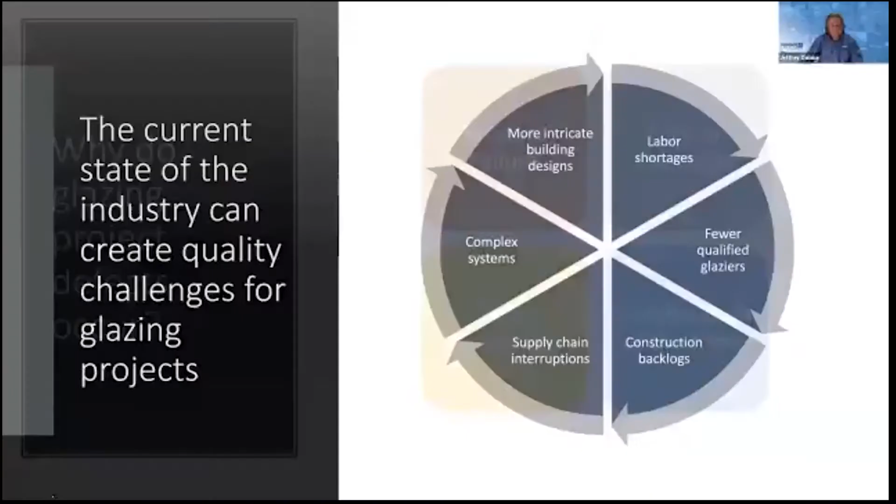While there are many reasons for a glazing project to have issues, there are some that are in direct control of the installer and the glazing contractor team. Product defects or failures from manufacturing are somewhat less likely, but can sometimes be headed off through thorough inspections and verifications of the material before it's installed. Where we're going to focus today, though, is on the discussion of oversight and verification, along with poor installation habits.

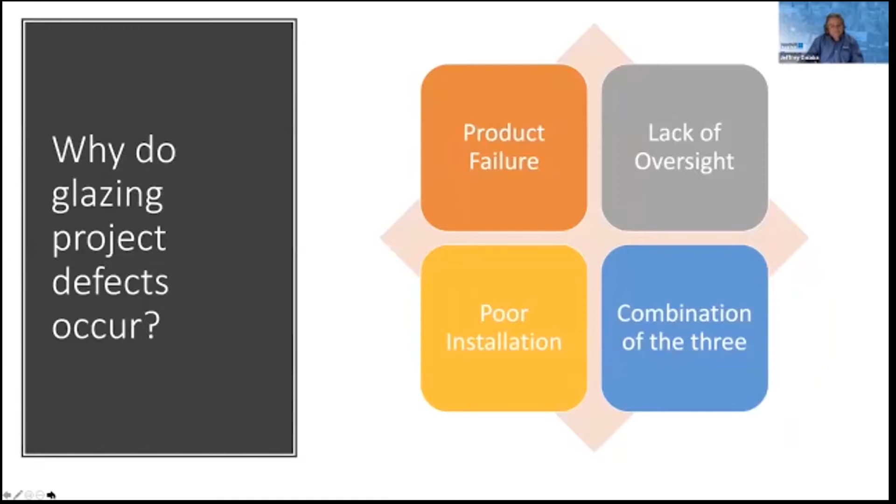Everyone seems to love pictures of projects where somebody else screwed up. We'll share a few of those today and talk about how they may have been avoided. But first, let's take a look at what we mean by quality management systems and how different interpretations of ways to install controls continue to provide better outcomes.

You're going to hear us talk about quality systems not just as an end check to see if errors are visible. You likely use many systems already in your shops and field operations for quality, with some that are written and some that are ingrained with years of experience and hard knocks. A quality management system, by definition, is a collection of business processes that are used to meet customer expectations and enhance their satisfaction, of course.

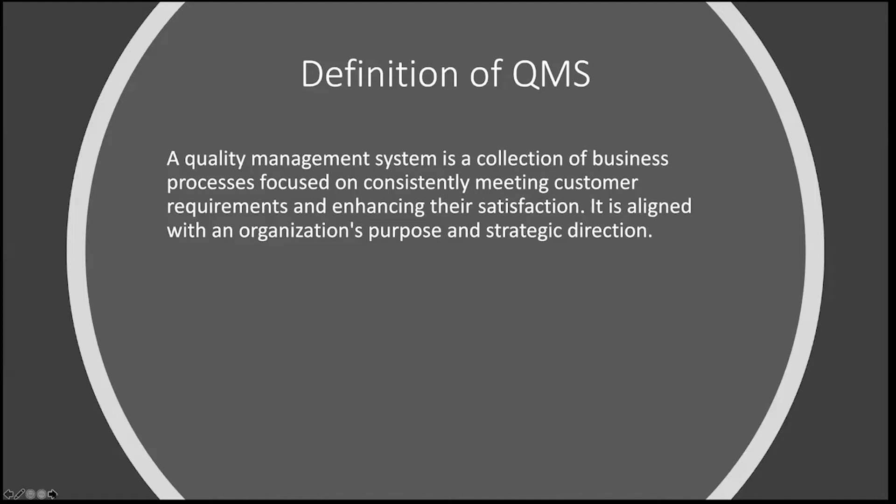It also ties directly to laying out the strategic direction of your company. In short, it's a one-stop system that controls the production and output of your company in a way that you decide will help bring the most value to your customers. So now let's take a look at what we mean by the word quality. We're simply referring to meeting customer expectations, customer specifications, contract requirements, and delivering a system that performs with fewer problems. This results in building a culture of professionalism within your organization and, of course, pride that carries through from beginning to end of every project you work on.

Let's also take a look at quality management systems and how they're built. As we mentioned a minute ago, a quality management system is a collection of business processes. The immediate item that jumps out to many when we say quality management systems is a quality manual. But the quality manual is simply the high-level layout of the entire quality program. The program itself includes procedures, methods, and checks to provide verification that the processes are carried out correctly.

Also, methods to capture deficiencies and prevent them from happening through corrective and preventative actions, along with managing customer feedback as it comes back. A good system will also include management input. This is achieved through annual internal reviews by management and audits, along with updating controlled documents and procedures. The whole thing works together to provide a controlled approach to quality on every project.

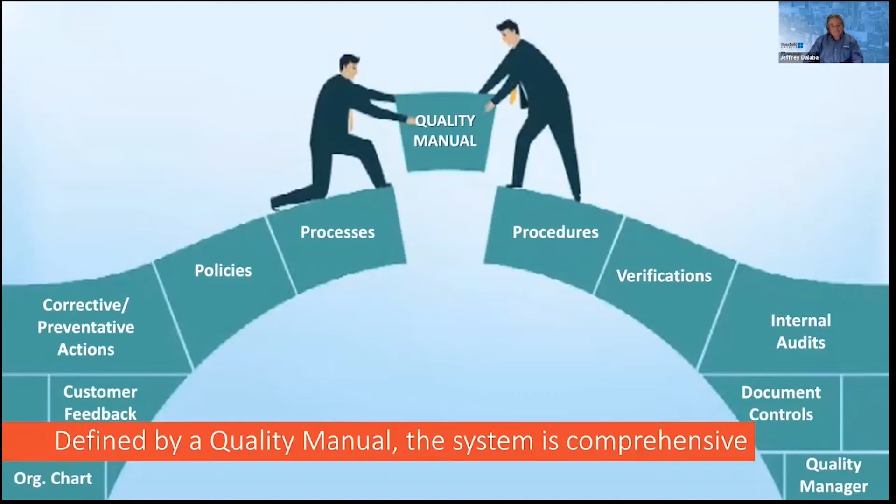I have to say that one of our NACC contractors said this best. He said, in the past, we focused on quality controls at the end of the process to make sure that client specifications are met. We spent significant resources fixing problems that could have been avoided. Now we put more emphasis on quality assurance throughout the process to prevent problems from occurring in the first place. And that was from Pacific Glazing Contractors in California.

I think what this really captures is that you're going to find some defects by looking at an end product, but there can be things that happen along the way that could be avoided. And that's really one of the things that we're focusing on today through this quality management systems discussion: each step of the way, there are opportunities to improve the overall outcome of the project.

I also think it's important that we differentiate QMS, or quality management systems, from quality control. What is the difference? We hear both. What does it mean when we say QMS versus quality control? They do go hand in hand, and they differ in their approach and also in their outcome. Quality management systems is simply a managerial tool. It's a very proactive approach to preventing defects. It involves your entire team, and it involves planning and a systematic documenting of processes. But when combined into one system, it prevents defects with a focus on process and controls.

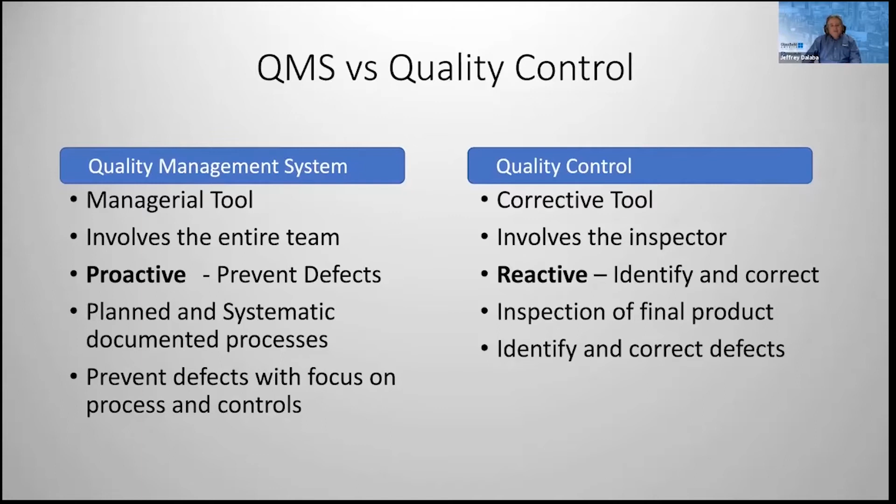Now, on the other hand, if we look at quality control, well, it may mean some different things to different organizations. In general terms, it's a corrective tool. It's a way of being reactive. There's an inspector or maybe a supervisor that looks at the end product and then identifies any defects or errors and marks them for correction. So they do go hand in hand, but I think it's important to note that quality management systems is a more proactive approach that involves a system in order to prevent the defects in the first place.

The important thing about quality management systems is that it helps the management team remove doubt and provide accountability when they're not at the job site watching the installation of every fastener or everything going into the system. Proper procedures and controls help to do that for them. And of course, QMS is all about improvement. So when an error or defect occurs, it has a defined path on how to improve and not repeat them in the future.

Now that you've had a look at what we mean by quality management systems and the word quality, let's take a look at what the final anatomy of a system like this might look like. And I don't want to concern anybody by making this look too complicated, but remember there are many pieces already in place in most organizations. Quality management systems is a way of helping to capture all of those into one place.

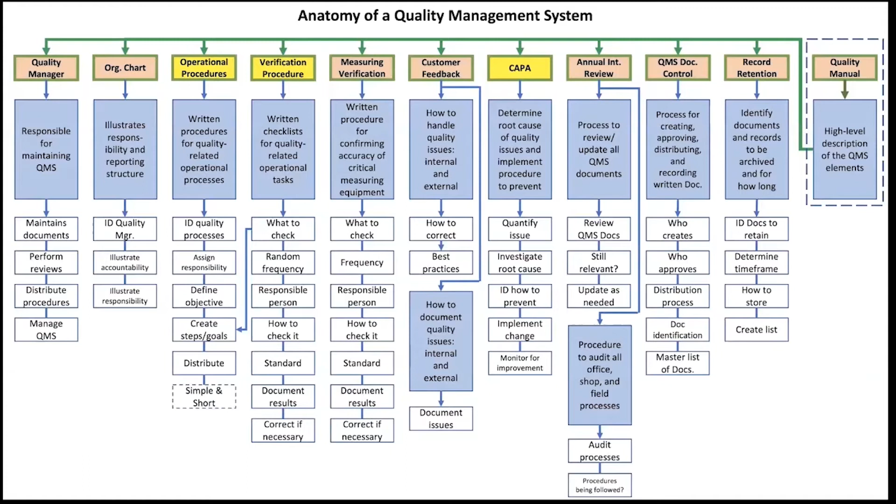We typically deliver these to our clients in three different workshops from a group of workshops that we offer. That's operating procedures, verification, and CAPA. We're going to look today at some high-level samples from each of these areas. And then as promised, we're also going to look at some pictures where somebody else made some errors, and it's always fun to see what somebody else is doing.

Let's start, though, at the core of this, which is creating operational procedures. We very much believe that operational procedures should be simple, and they should also do what makes sense for your business. This isn't a time to create something that's cumbersome and hard to follow, or many pages, or in fact reams of paper in some situations. This is simple, clear, and concise.

Why is it that we have procedures in the first place? Well, it's a way to create a track to run on. But we're going to talk about that, along with how to create procedures, and give you some examples of what a procedure looks like, both in an assembly situation along with verification. And then we're also going to talk a little bit about document controls, because when you have procedures, it's important also to control those procedures.

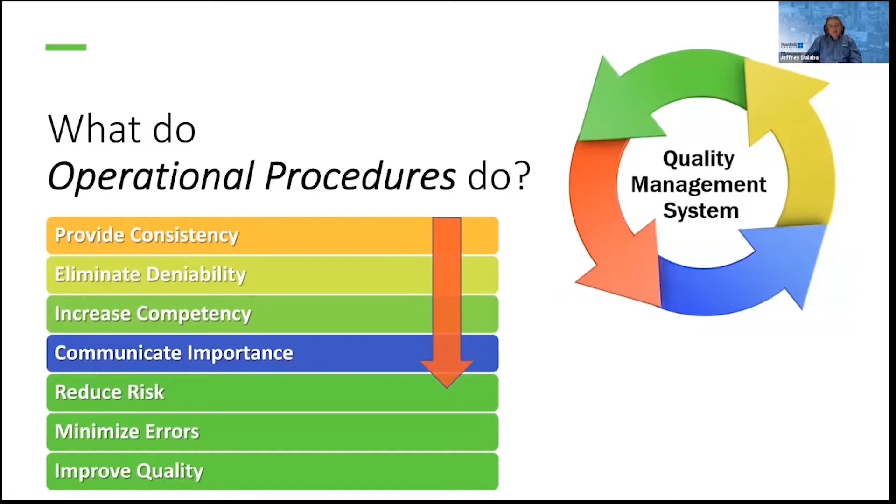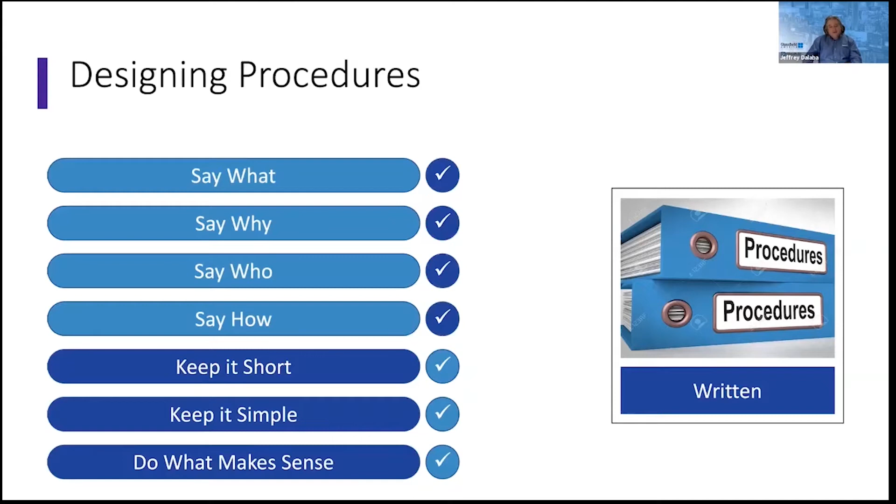It may seem daunting at first to say, how do I write a procedure, and how am I going to make it short and concise? Well, it all starts with having a track to run on for the procedure. We have to say what the procedure is for, why there's a procedure in place for that operation, who is assigned responsibility, and how—that's the steps, that's how it's done. Again, clear and concise: one sheet of paper is better than multiple sheets when possible. Keep it short, keep it simple, and as we said, do what makes sense for your business. This is an example of a procedure.

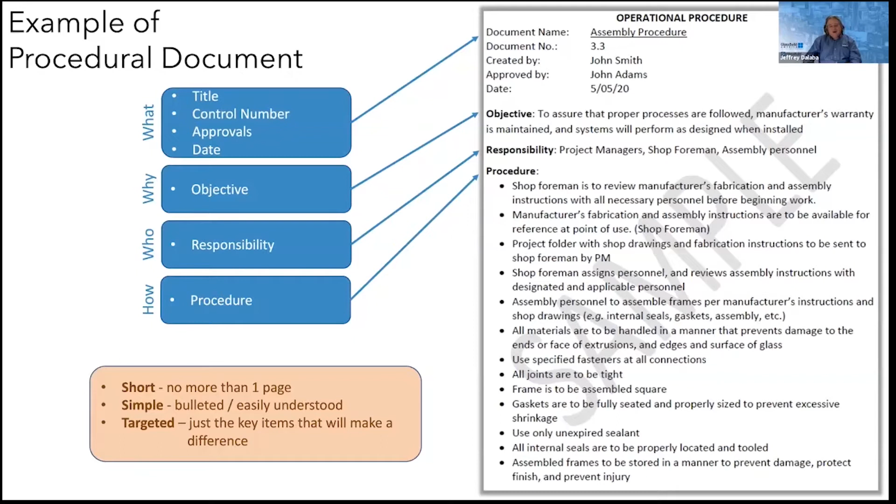And this, of course, is just a simple example. Each organization would have different takes on what should be in an assembly procedure. But I think you'll see from this one-page example, it's short and simple. In this case, we use bulleted points to cover this so it's easy to follow. It's also targeted—just the key items that make a difference are highlighted.

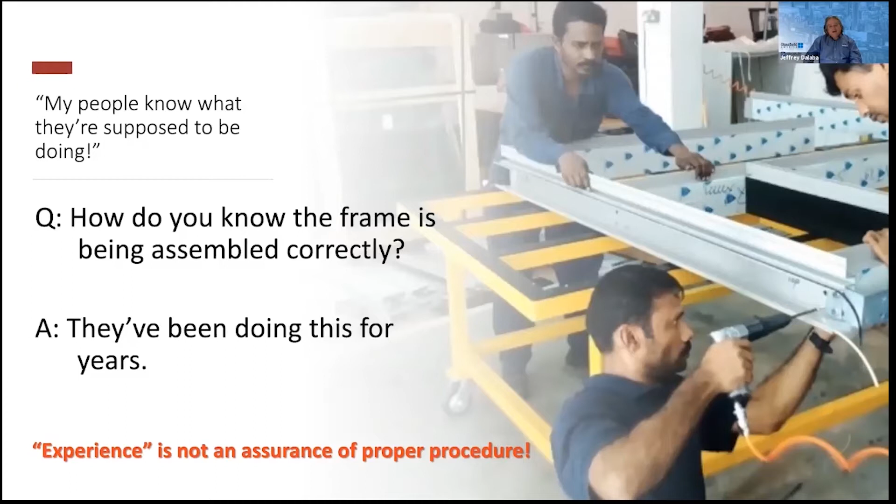As a segue from that, since errors do come up, corrective actions and preventative actions are a way to improve your quality and performance. Corrective and preventative actions do exactly what they say—correcting items that come up as deficiencies, defects, or failures, but also preventing things from happening in the future that could impair quality. I'm going to turn it over to Ben Beeler now to talk about this section, and thank you.

I'm going to talk a little bit about corrective action and preventative action, what we call CAPA in the industry. This is really the cornerstone, the foundation of a quality improvement process. Without this, you really can't improve quality.

So I'm going to ask the tough question now. Is quality important to your business? Well, of course it is. Everybody says it is, everybody believes it is. But how do you measure quality? If you're not measuring quality, then how can you control it? How can you improve it?

There are a few things that businesses look at in determining whether or not they're going in the right direction, and they have indices, graphs, numbers they look at on their dashboard on a day-to-day, week-to-week basis. But seldom is there a number for quality. So if that's the case, how can you hope to improve it?

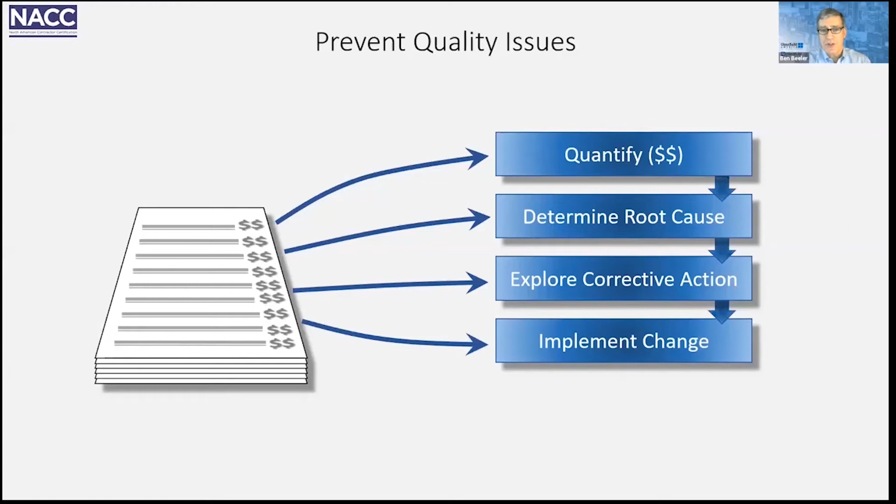These are the procedures that Jeff talked about—this is the roadmap. And then don't stop there. Monitor the effectiveness and look going forward to see if this type of problem happens again.

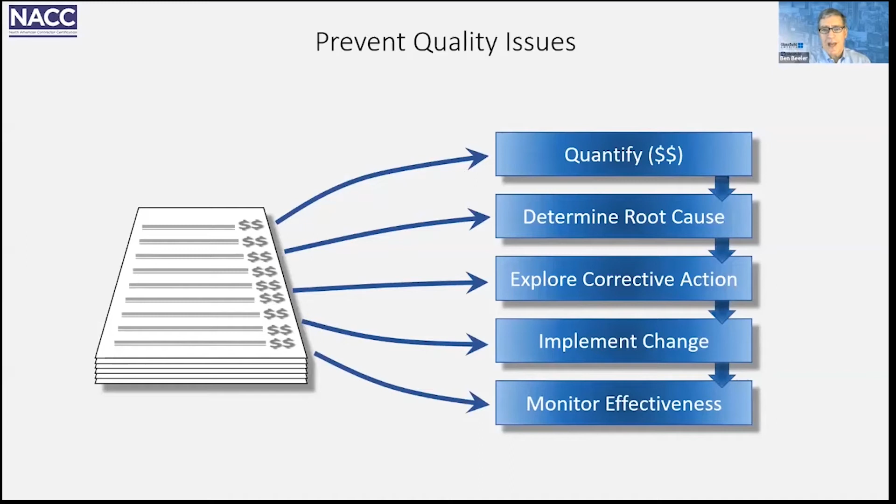Now, if you really want to pinpoint your focus and make a big improvement in your company going forward, you need to take all of your errors and documented quality issues and categorize them—either by type or by root cause. Put them into specific baskets, a dozen, half a dozen, whatever makes sense. The fewer the better. But categorize them so you've got groups of problems caused by the same type of issue.

Examine a specific time period. Go back 3 months and look at those categories and see what's in those categories. What dollar value, which basket is the most valuable basket.

If you don't have that data going backwards, then start now, go forward 2-3 months, and then examine the dollar value of those baskets. Rank them by value, and then attack them in order of the most valuable to the least valuable. That way you'll make the biggest impact on the quality of your company.

And then as you go forward from that point, continue to monitor those baskets to see if more items are going into those categories, or if you're actually making an impact. If they continue to go up, then you might need to re-examine what the root cause was or re-examine what your implemented procedure might have been.

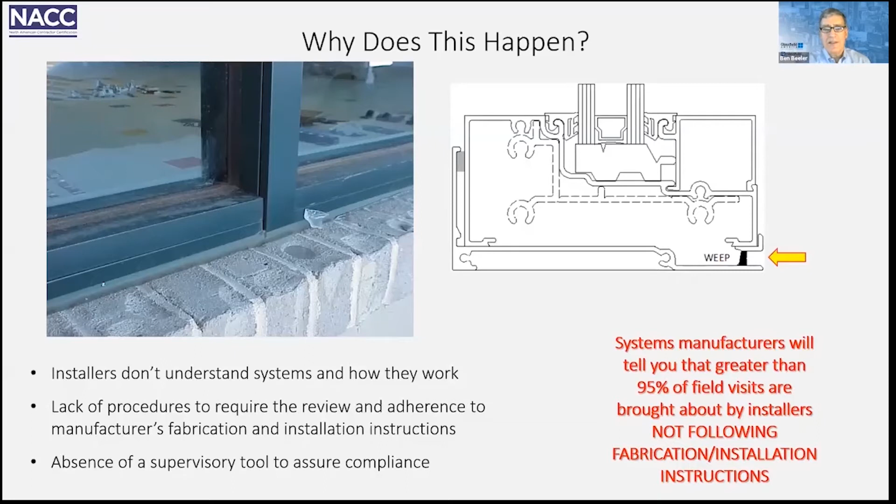So that's procedures. And then thirdly, absence of a supervisory tool to assure compliance. This is management. It's management's responsibility to make sure things are being done right. But so often it's not pinpointed. There's no set procedure that they use for checking to see that things are done right.

So let's look at root cause. Let's look at some issues and let's look at the root cause. But it's not so much the how did it happen, which is typically all we look at in the field, but what happened? Why did it happen? Where did it happen? When? There's a lot of things that go into figuring out exactly what caused a quality issue.

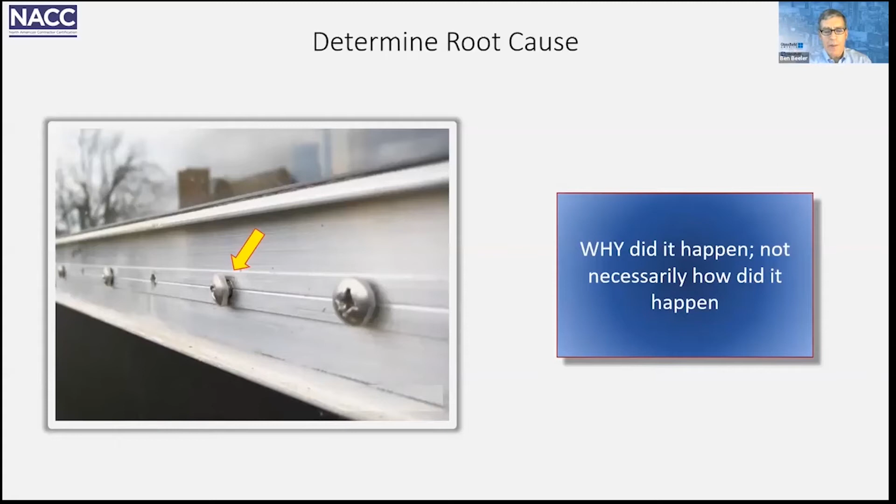The typical scenario is when the question's asked, what happened? The answer would be the pressure bars weren't snug against the glass. Naturally, the next question is, how did that happen? And the answer would be the installers didn't tighten them enough. Well, it's kind of obvious, but that's typically where people stop. They chastise the employees, they correct the issue, and then they go about business without any concern for what's down the road.

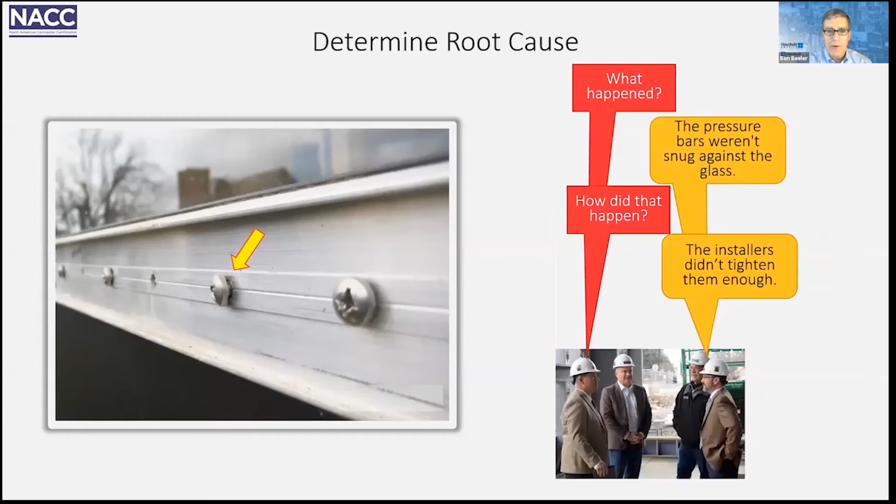So if you look at this, you go through the root cause analysis of why this happened, you find, and this is just one scenario, one situation that we have seen in the field. We'll look at several here, but in this one, the first installer was told another worker would come behind him and tighten the fasteners to the proper torque. So why wasn't that done? Because another worker came along and put the cover plates on before the tightening was done.

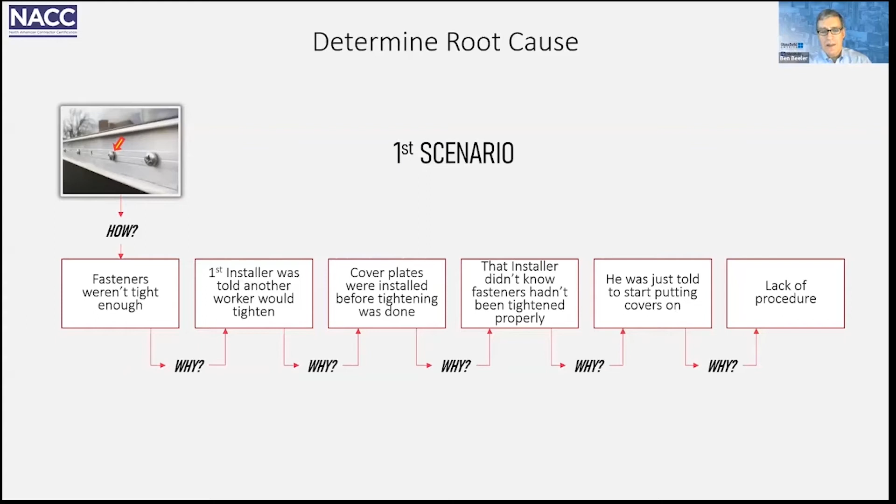Why did that happen? Well, that installer didn't know that the fasteners hadn't been tightened properly. Why didn't he? Well, he was just told to start putting covers on. So he didn't ask any questions, he did it. So why did that happen? Well, it was because of a lack of procedure. There were no expectations that people understood what they were supposed to be doing specifically in their jobs.

So if there were a quality control procedure for curtain wall installation that had these 3 bullet pointed items, chances are this would not have happened. The people would have done what they're supposed to have done, pointed out that they hadn't finished before the final covers were put on. Pressure bar fasteners are to be tightened as specified.

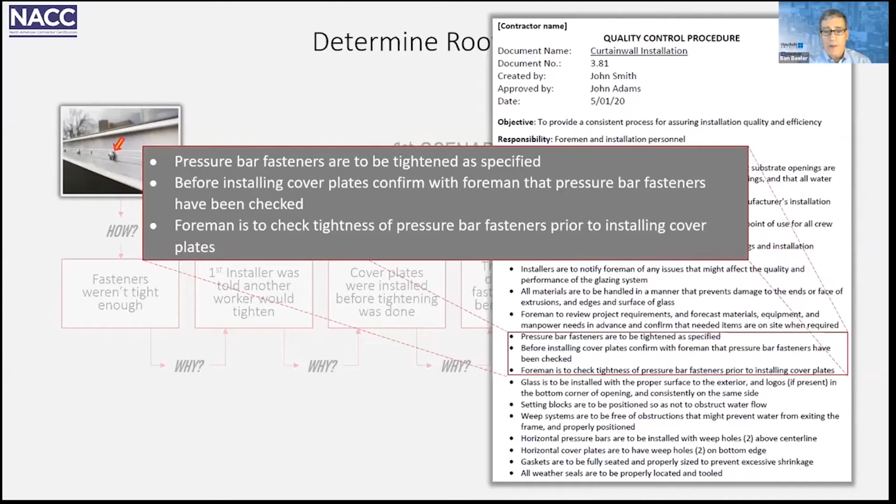Before installing cover plates, confirm with the foreman that pressure bar fasteners have been checked. The foreman is to check tightness of pressure bar fasteners prior to installing cover plates. This type of procedure would more than likely keep that problem from happening.

A second possible scenario, one we've seen in the field, is that installers thought they were tight enough. Why did that happen? Because they weren't familiar with the system. Why weren't they familiar with the system? Well, their supervisor hadn't reviewed the manufacturer's installation instructions with them, so they didn't know exactly what they were supposed to be doing. Why not? Because the supervisor thought these guys knew what they were supposed to be doing.

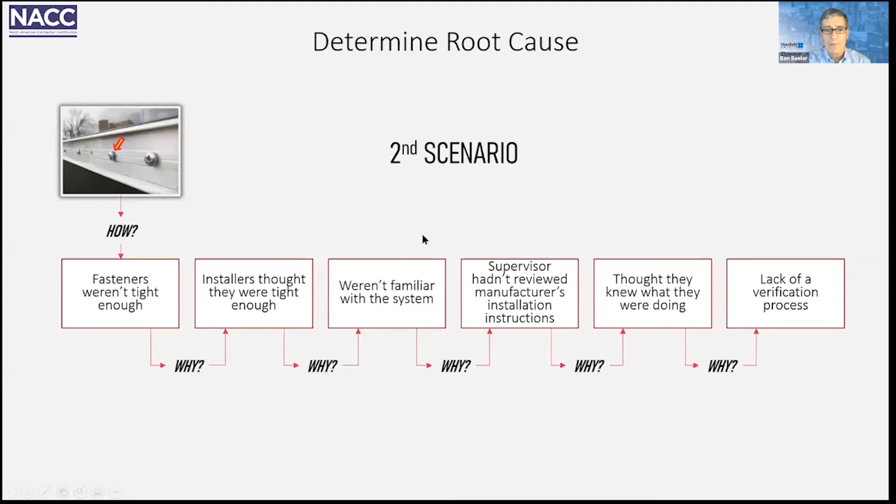So how was this not caught? There was a lack of a verification process. The supervisor didn't come back to check that things were done the right way. He just assumed. So if there were a written verification or checklist that said pressure bar properly tightened to specs, which the supervisor had to fill out periodically, this situation would have been caught.

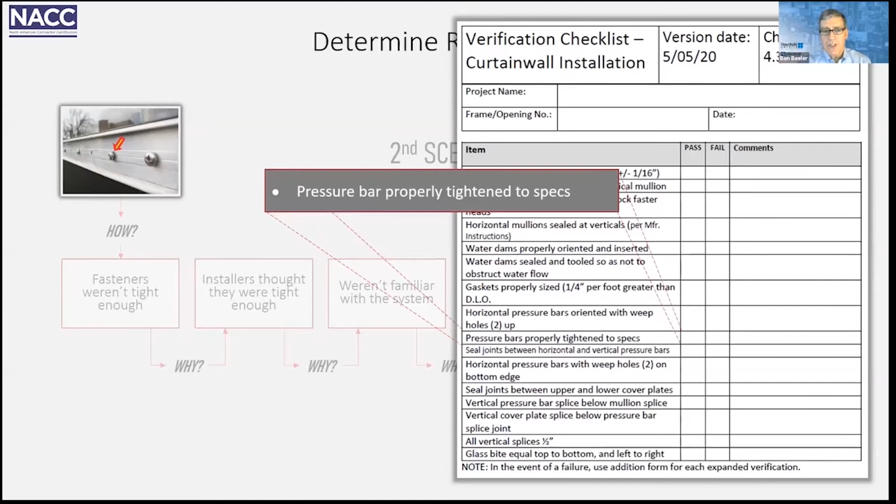A third possibility, and in this particular picture, this is actually what happened. Fasteners wouldn't go in any further. Why not? Fasteners were too long for the system. Why were we using fasteners too long for the system? Because the PM ordered those fasteners from a different source to save money. So all eyes turned to the PM.

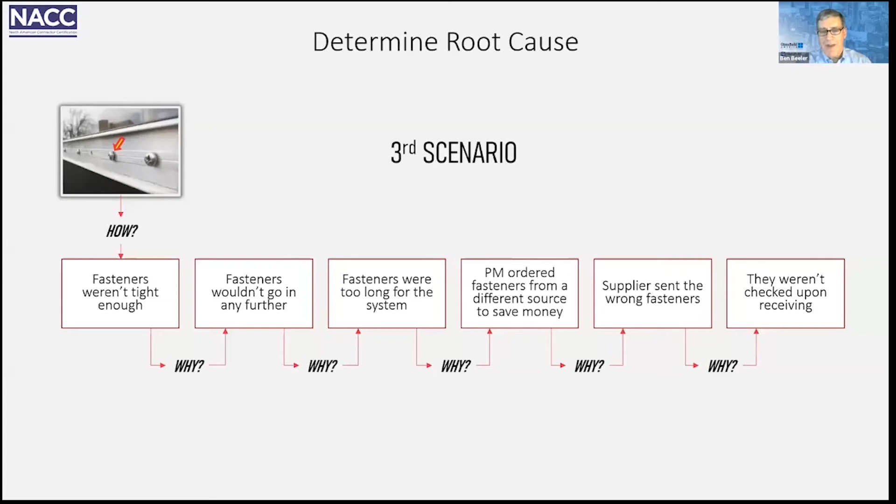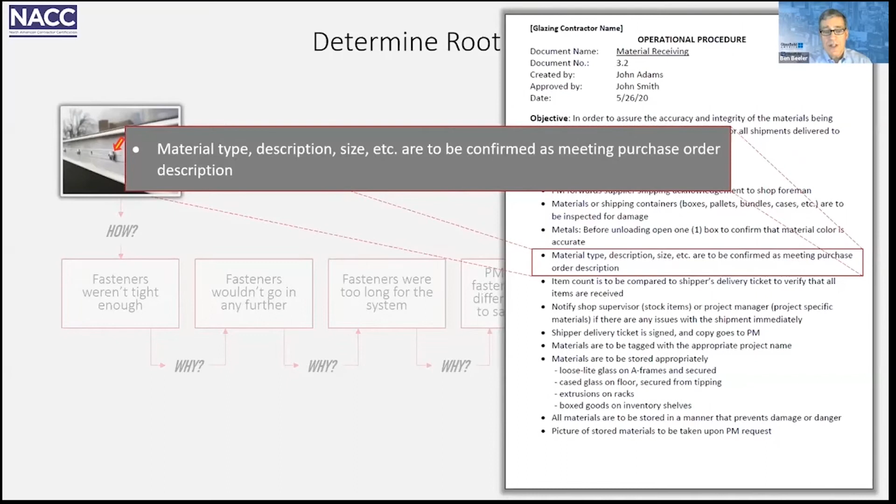Well, he didn't do anything wrong. So why were the screws too long? The supplier sent the wrong fasteners. And why wasn't this caught? Because there wasn't a procedure in the shop for verifying that received materials matched what was ordered. So the shop took in the wrong fasteners and sent them out to the job site, and this was the situation. Had there been an operational procedure for the shop receiving materials, with a bullet point stating that material type, description, size, etc. are to be confirmed as meeting the purchase order description, this situation likely could have been averted.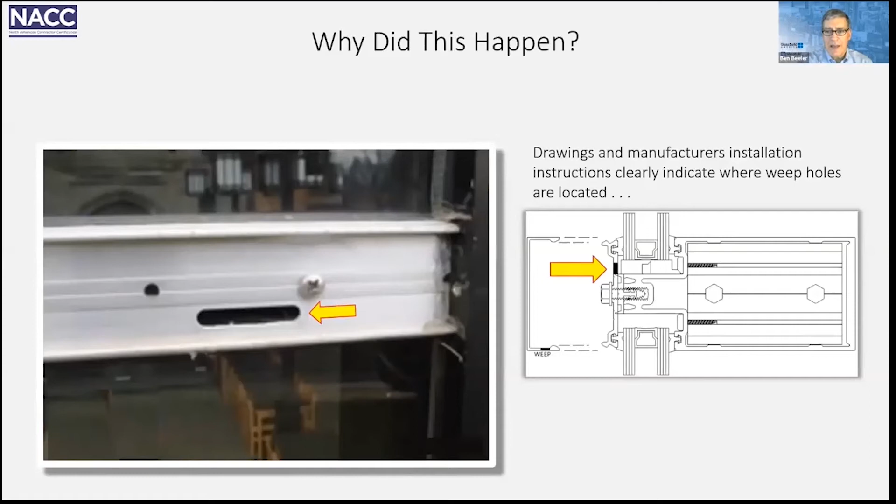But why did something like this happen? Pressure bars are put on upside down. The weep holes are below the center line, so they're not doing any good. The drawings and the manufacturer's installation instructions clearly indicate where the weep holes are supposed to be located, but yet they weren't placed there. So you start digging down. The installer thought that since water flowed down, weep slots should be low. I've actually heard that before, many times. In theory it sort of makes sense, but in practice it's counter to the way the systems are designed.

So why did this go unchecked? No one told the installers that it was wrong. Why not? Supervisors didn't catch it. Why not? He either wasn't checking, or more frighteningly, he didn't know what to check for. So why didn't he check or know what to check for? Because again, there was a lack of a verification procedure.

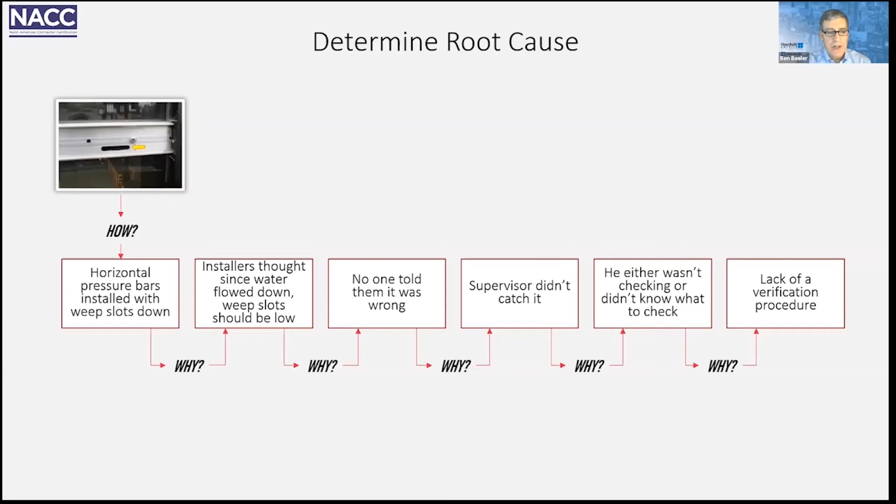Looking at another example, here's a curtain wall that was placed right on the sill. There's no gap between the sill and the curtain wall, even though the drawings call for a 3/8 inch minimum. And there was no room for the system-provided T-anchors, so they fashioned something similar that they thought would hold the system in place.

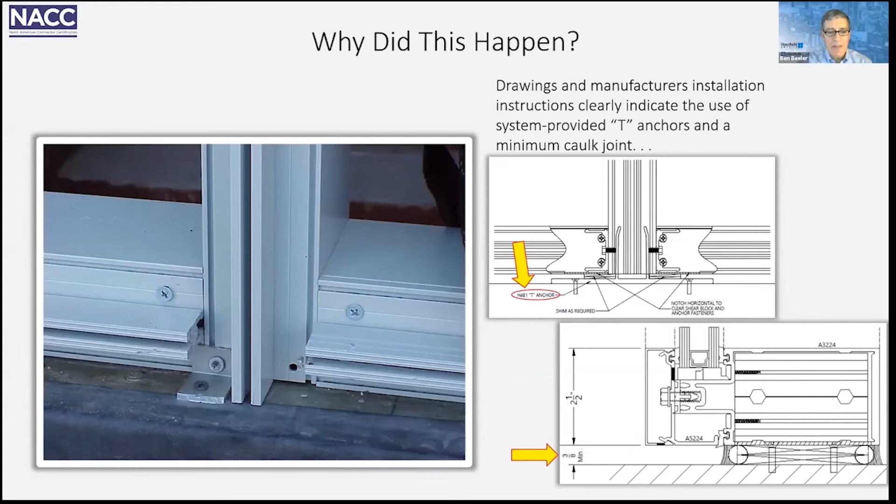So why did this happen? The opening didn't properly accommodate the frames. Why not? Wrong deductions were made for the finished opening size. So why did that happen? Because field conditions didn't match the construction drawings. Why didn't they? Because last minute changes were made to the opening by another subcontractor. So why wasn't this caught? Because the field supervisor didn't notice the change to the opening.

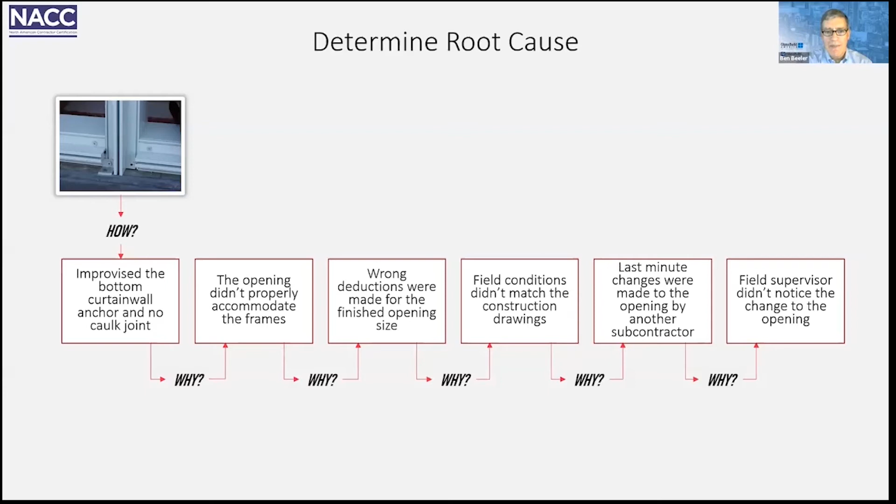This is how you dig down through the layers of reasons to get to the root cause of the issue. Only when you get to the root cause can you actually attack the problem for the future. So in each one of these situations, there's a lack of a well-defined operational procedure or a verification process. Either one of those would catch it. The verification process would catch it if the operational procedures didn't cover it effectively.

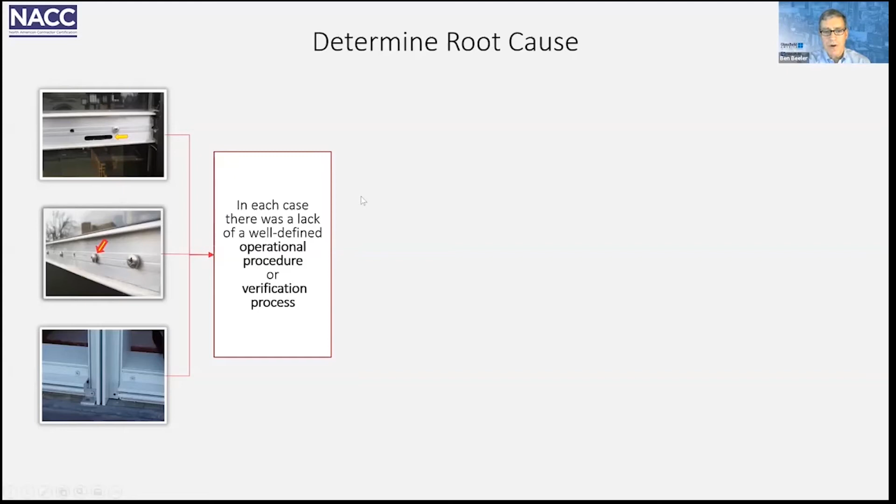So if you take the root cause analysis exercise we just went through and turn it in on itself, and ask why does this happen? Why are there no well-defined operational procedures or verification processes? You typically find that management is relying too heavily on what they think their people know, and not enough on defined processes. This is not uncommon in this industry. So look at it a little bit further, dig down a little bit deeper.

Why does this happen? Management's typically focused on putting out fires and not focusing enough on the business as a whole. Putting out fires is the nature of the beast, it happens in this industry. But with the right processes in place, things can take care of themselves to some extent.

So why does this happen? Because there's a lack of understanding about the benefits and implementation of a quality management system. Management typically doesn't realize what a quality management system can really do to easing some of the pains that they feel job to job.

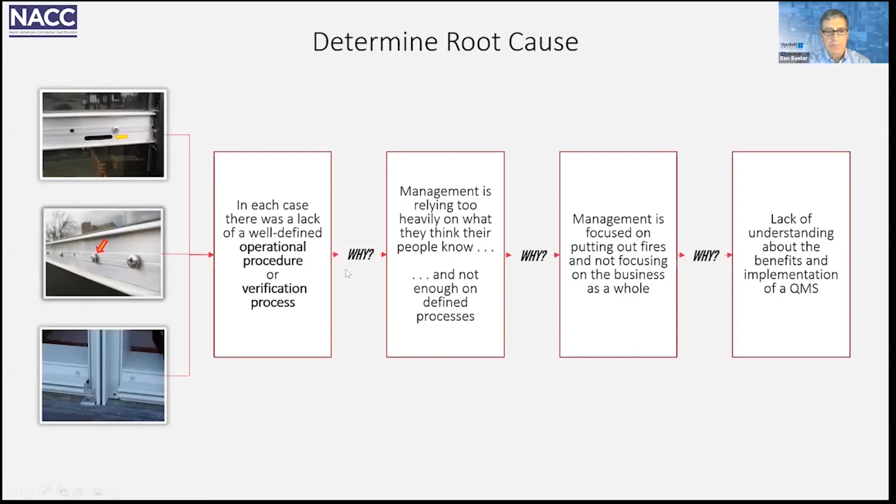So you look at these things. Upper left, curtain wall right up against the wall, no workable joint there. On the bottom left, the wrong fasteners were used to fasten the shear block to the vertical member, so they didn't hold, which allowed the horizontal mullion to push out. And then on the right, a hodgepodge of materials scabbed together to create a setting block.

These things you look at and it's easy at one point or another to point a finger, but whose responsibility is it really? Is it worker responsibility or management responsibility? Well, obviously it's both, because they're both doing jobs that relate to these type of things.

So the first thing that needs to be looked at is education, that's training. They need to be trained on what to do and how to do it and why they're doing it. That's probably the most important thing. If they know why they're doing it and the consequences of not doing it right, they're much more apt to do it correctly. And then management's responsible for setting expectations.

They have to let workers know what it is they're supposed to be doing. And we're focusing on a lot of field issues here, but that's not where it stops. Management needs to set expectations for their estimating staff, their project management staff, administrative support staff, as well as shop and field. Expectations need to be set, and that's where procedures come into place that Jeff talked about.

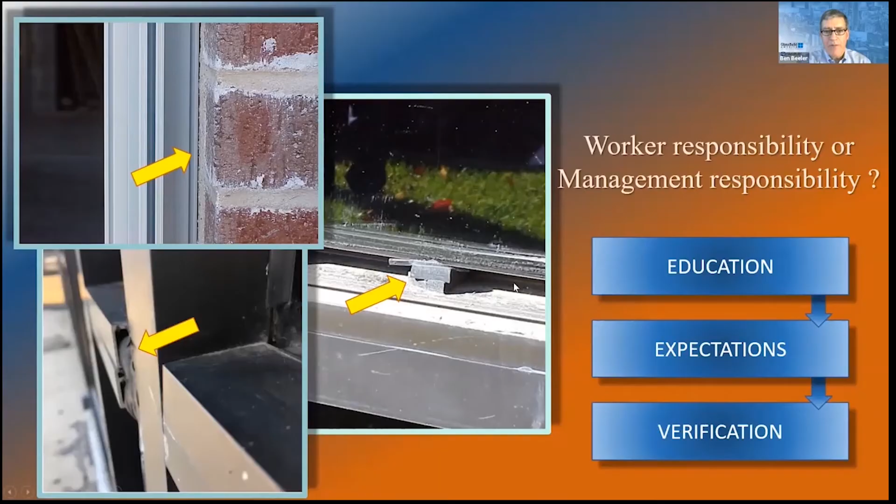Verification is simply a written confirmation that a task has been properly performed. And it's done typically through random sampling. You don't have to check everything. If you've got a problem, it'll show up through random sampling.

So you do random sampling and you use a written checklist, and I stress the word written. A written checklist makes the supervisors accountable to certain things that you want checked. And because it's in writing and because you need to have it turned in to somebody, your quality manager or some management personnel, then you've got the proof that it's being done. And it's in writing because, as we all know, if it's not in writing, it didn't happen. We've learned that lesson the hard way.

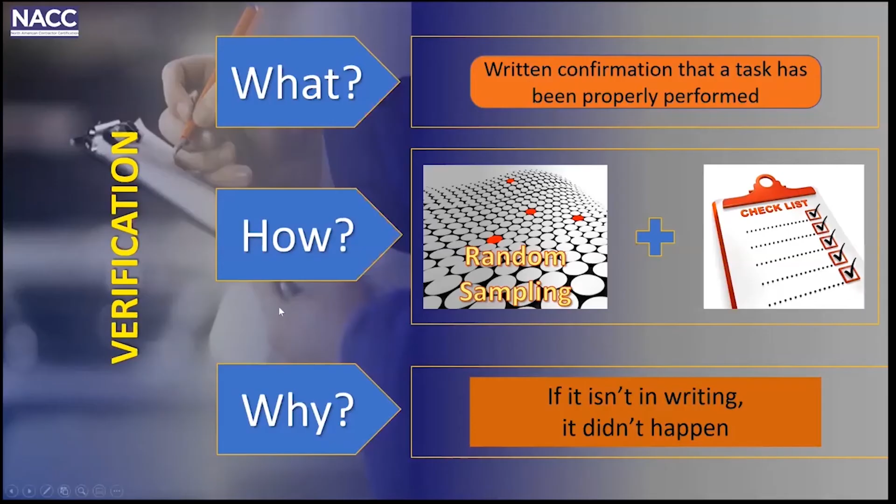So these are the elements of a verification process. The benefits are many. First of all, it tells supervisors what to look for, not just go out there and make sure they're doing that right, but go out there and make sure that they've got the weep holes in the right location, that they've got the right length gaskets, that they've got sealants where they're supposed to be, and the weep system is open. It's telling them what's important to you.

It also gives them a management tool, a tool for them to manage the people that work for them that they haven't had before. They've been told, go make sure they're doing the right thing, well, they're pulled in a million different directions. This focuses their attention on what's important. It tells everybody in the organization what's important. Workers who know that somebody is going to randomly check their work to see that it's done right are more apt to elevate their performance to meet your expectations.

The fact that you're checking also identifies trouble spots. If there's an issue, if there's a problem and you find it, then you know where you need to be focusing your attention, most likely training in a lot of situations. It could be procurement, it could be drawings, it could be other areas. But the verification process that finds something wrong shows you where your trouble spots are and where you need to pay attention. And finally, it gives you peace of mind. You can sleep at night knowing that things are being done right rather than just assuming or hoping that they're being done right.

Now, a checklist has to be manageable, kind of like procedures. They've got to be short and simple. It's got to be not so lengthy. You can't cover everything. You just want to spotlight the key items, the things that if they're not done right will make the biggest impact, the biggest problems. So spotlight the main things that you want to make sure that people are doing.

A checklist should also indicate the desired characteristic. It's not enough just to say, check setting blocks for proper location. You want to say, check setting blocks to see that they're at quarter points. I just use that as an example, but you don't want to assume by the way you word the checklist that the supervisor knows the way it's supposed to be done. And he probably does, and he should, but you want to remove any doubt. You want to have the desired characteristic listed on the checklist.

And you can check for things that require disassembly. For instance, that setting blocks are at quarter points. I just use that again as an example. To do that, your supervisor may need to remove the pressure bar, or to check to see that the pressure bar weep holes are above the center line, he may need to remove the cover plate. It's okay to have checklist items that do require that. The checklists create accountability to the supervisor, as I mentioned before, for what to inspect.

Checklists should have a place to put the project name and some sort of location identifier for future reference so that you know which frames were checked. And it should describe nonconformities. Anytime there is a nonconformity, there should be an area on the checklist where you can describe exactly what the nonconformity is, the details, because it's that information that you will then use later when you look for corrective actions and preventative actions. It's that information that you'll put into your log of quality issues to determine if you're improving or not.

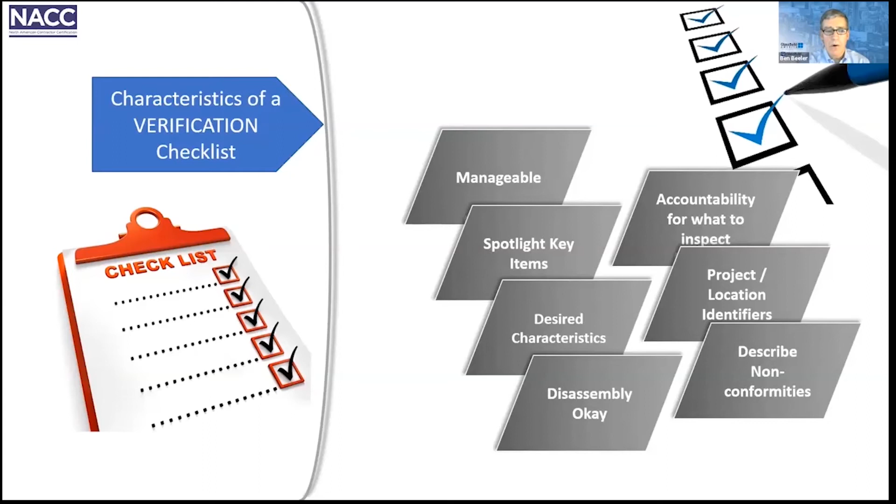So that's the checklist. So how often do we check? What do we check? Again, it's dependent upon your business and what makes sense for your business. Do you sample one per floor, one per day, 1 in 5? It all depends on a lot of things. The things you want to consider is what the likelihood of a problem is. You want to look back and figure out the frequency and severity of past issues. That'll help you determine how much you want to check in a given job.

You might want to consider the complexity of the project, the complexity of the system, or even the client that you're trying to impress. Look at the risk, look at the crew experience, and look at the direct or incidental repair costs should a problem occur down the road after turnover. All those things are characteristics you want to consider when you determine if you're going to check 1 in 5, 1 in 20, or 1 per floor.

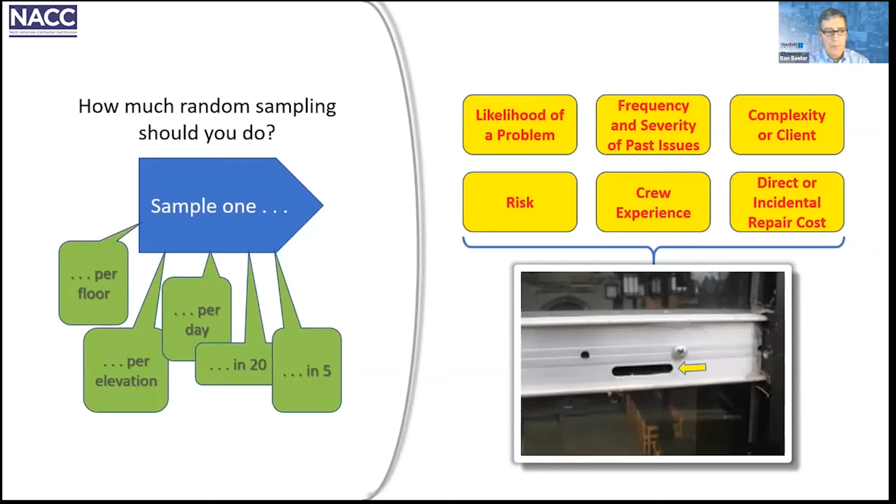So what happens when you find a nonconformity? Well, you want to expand the inspection. If it passes, of course, you stop. If there's a failure, then go 3 more. I use that as an example. Check 3 more openings. If none of those fail, then you've probably got a one-off situation. If you find more failure, then of course you want to expand that further.

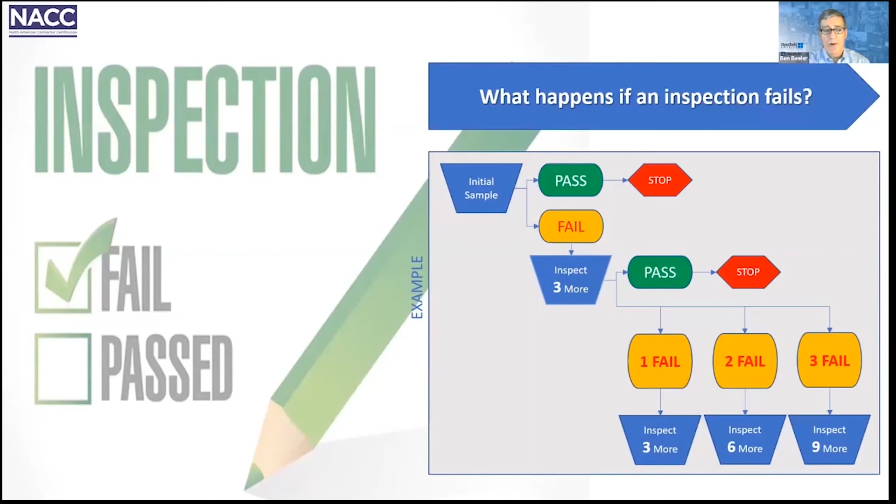So the checklist, the things that you want to check for, in the examples that we've been using in this particular situation, we get a lot of mileage out of this picture. The weep holes are below the center line. So your checklist item should say, are horizontal pressure bar weep holes above the center line of the pressure bar? Yes, no. If you had a checklist like this and the supervisor used that and took the cover plate off and found this, then you would know that you've got a problem on this particular job.

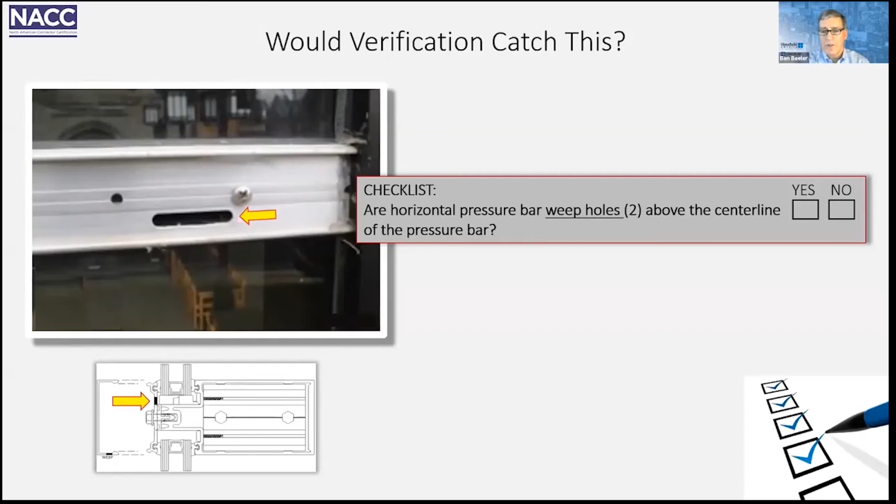And again, it's not just asking or suggesting that they look to see if the weep holes are in the right location. This is actually setting the characteristic for the desired effect. It's saying above the center line of the pressure bar.

This is a project. Again, it's a pressure bar system curtain wall. The cover plates have no weep holes on the bottom. So that may be something you want to check. And it should say something like, do horizontal cover plates have weep holes located on the bottom edge? Yes, no. This would be caught in that situation.

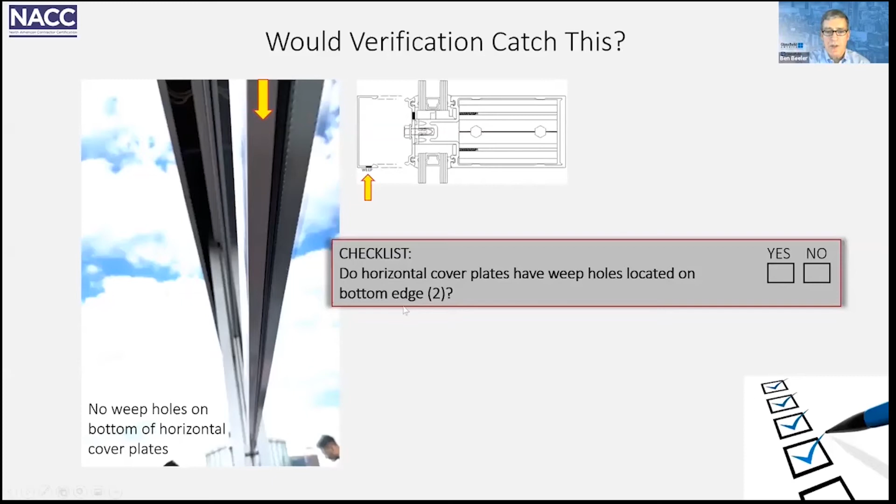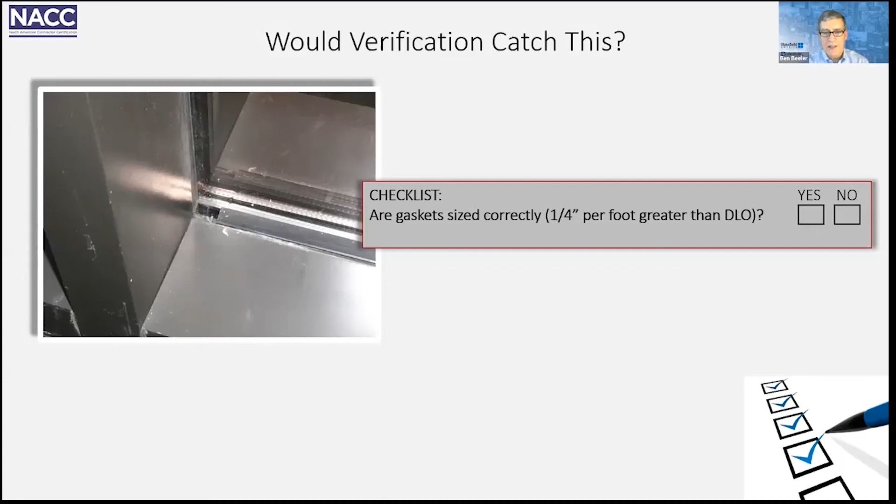Now, I'll turn it back over to Jeff at this point to talk about how quality management systems give your company a competitive edge. All right, Dan, those were some great points, and thank you for sharing that.

Let's recap a bit. We started the program talking about what quality is and how quality management systems operate and what they mean. We've also shown some examples and samples of components of the system. I hope that you'll agree that you can gain a competitive edge when your team is performing at their best, with a proven track to run on.

Using a proceduralized and verified approach not only increases competency of your team, but helps build a culture that instills pride and confidence. And really for you, in the end, you're reducing your risk and dealing with fewer errors and headaches that can be quite costly.

We've talked about following plans and documented procedures. This approach could have prevented this library vestibule from having the curtain wall components and storefront components installed in the wrong locations. The plans called for a curtain wall system for the exterior, but it was simply reversed. Procedures and verifications could have caught and prevented this situation altogether.

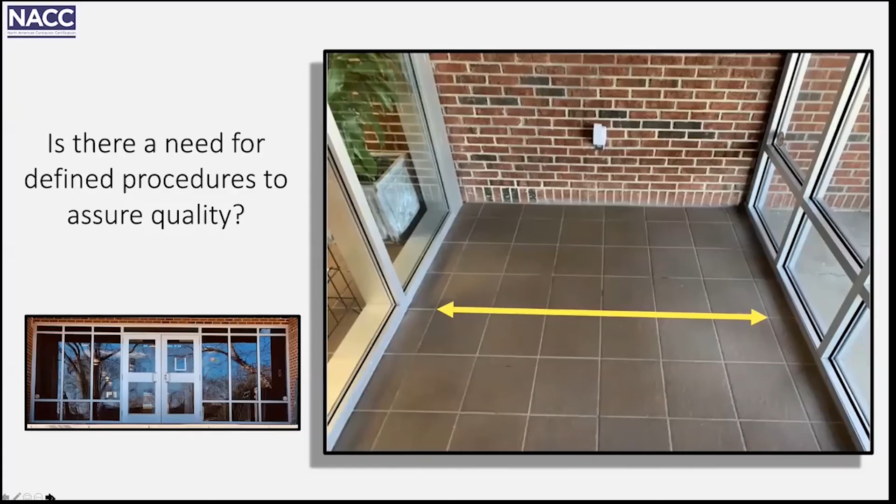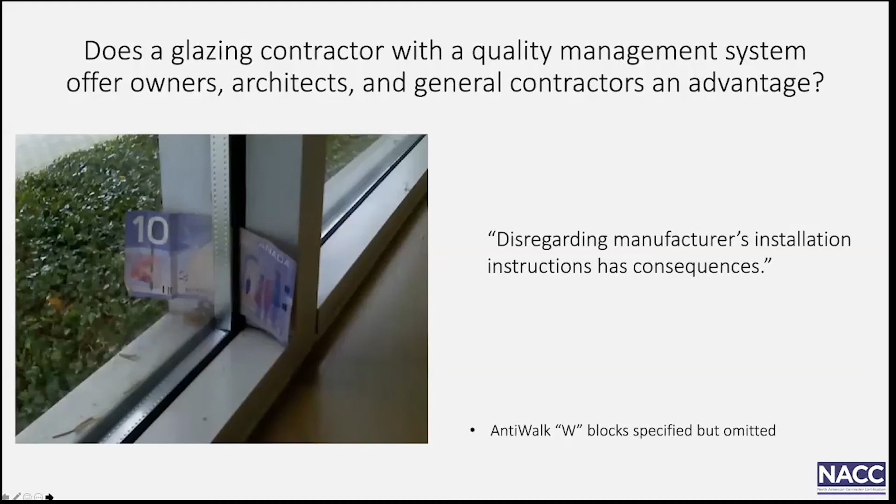But procedures and manufacturer's installation instructions especially are a key part of quality in installations. This example could have been prevented in this high vibration area by simply installing according to the guidelines, which required anti-walk or W blocks that had been specified but were omitted in the job. I think you all agree it costs a lot less to do things right the first time and have the processes and procedures in place to do that.

Increasing staff competency and, more than anything, a culture of quality is valuable. Understanding that it's not okay to use some other part that happens to be around when the right thing isn't available. A culture which makes it not okay to skip steps or not adhere to requirements.

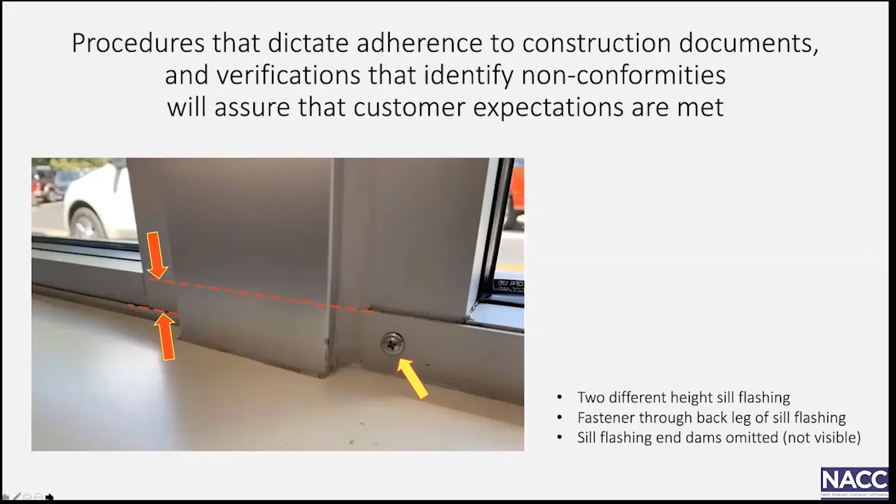We hope this workshop's provided some ideas and maybe shed some light on ways to improve your organization and ideas for things to possibly consider implementing. Today, we'd like to welcome you to further the conversation and maybe even an opportunity to walk through some additional examples and samples and ideas.